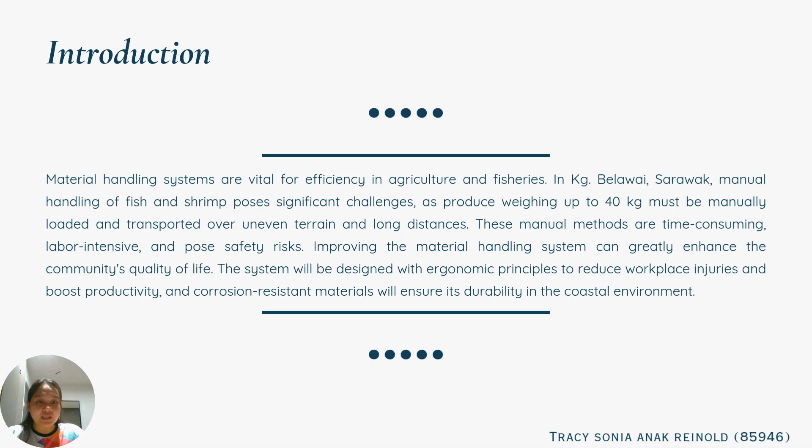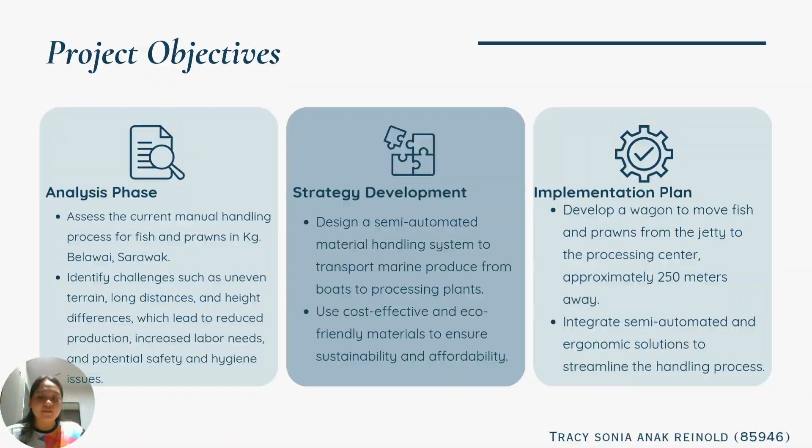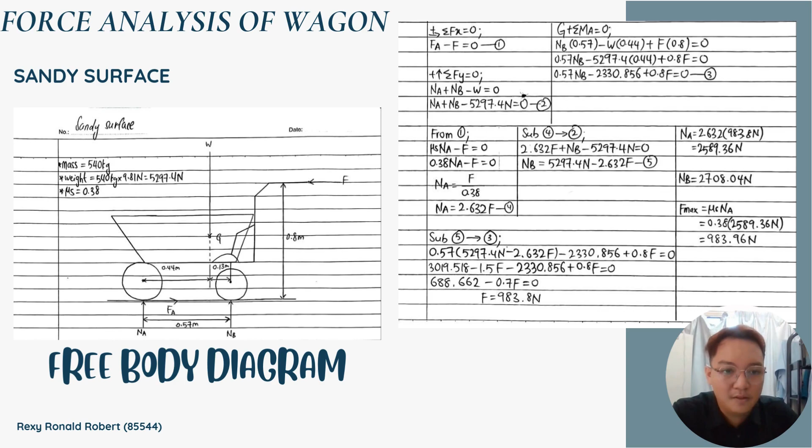After getting the force applied, we can calculate the normal force on point A and point B. Not to forget, we also need to calculate the maximum force, by using the formula coefficient of friction times normal force at point A. Based on engineering theory, if the force applied on the wagon is lower than the maximum frictional force, it cannot overcome the tendency of the wagon to remain static. So based on this calculation, for the sandy surface condition, the wagon is unable to overcome the maximum frictional force, hence it will have trouble moving.

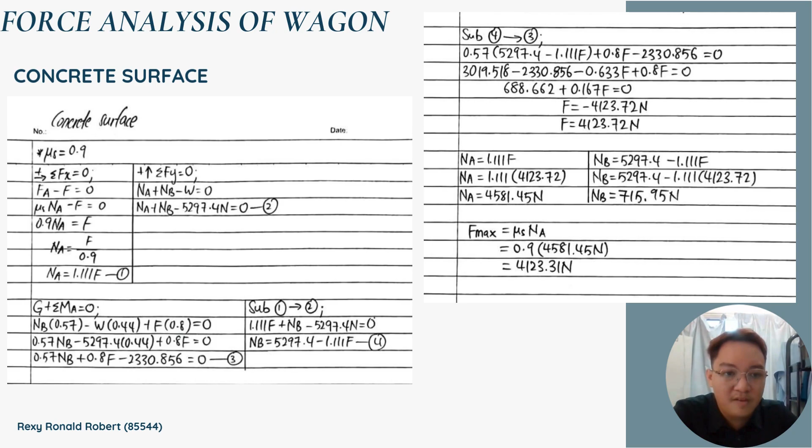So now let us proceed to the concrete surface calculation. By using the same formula and same steps, we can calculate the concrete surface by changing the coefficient of friction to 0.9. By looking at this calculation, we can see that the applied force is indeed higher than the maximum frictional force. So for the concrete surface condition, the wagon is able to overcome the maximum frictional force, hence it will have no trouble moving.

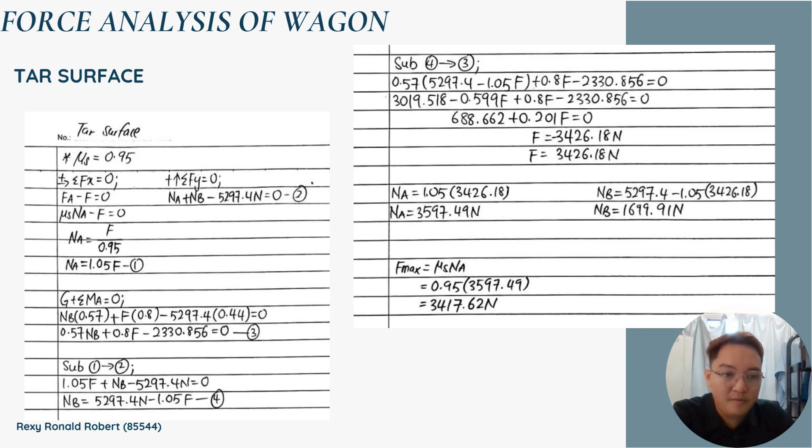Now lastly, for the tar surface, same as the previous slide, we can use the same formula and same steps, only changing the coefficient of friction to 0.95. Same as the concrete surface, the applied force on the tar surface is indeed higher than the maximum frictional force. So for the tar surface condition, the wagon is also able to overcome the maximum frictional force, hence it will have no trouble moving.

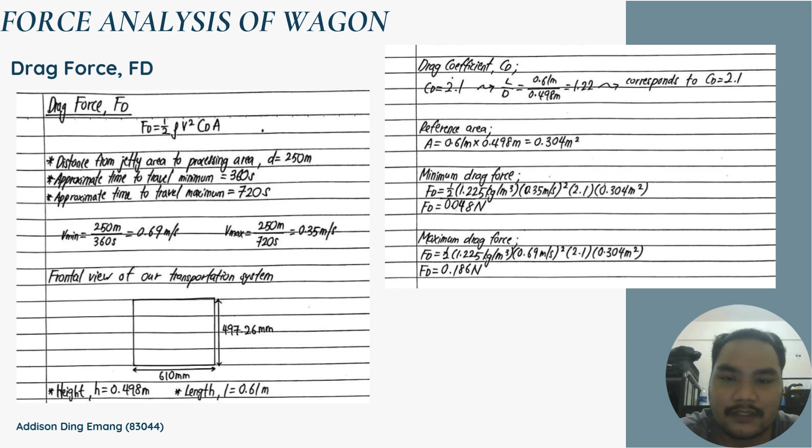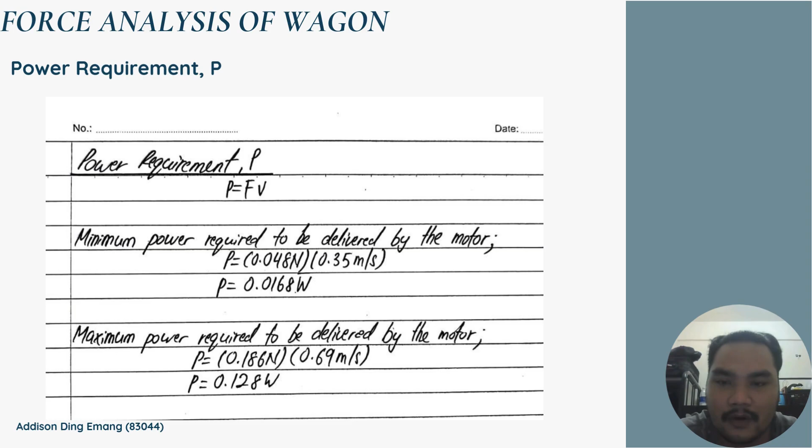And we can calculate the minimum and maximum drag force using the formula Fd equal to 1/2 rho v squared Cd A. The minimum drag force is 0.048 Newton, whereas the maximum drag force is 0.186 Newton. Since we are going to install an electric motor for our wagon, we need to calculate the power requirement. Using the formula P equal to Fv, or power equal to force times velocity, the minimum power required to be delivered by the motor is 0.0168 watt, whereas the maximum power is 0.128 watt.

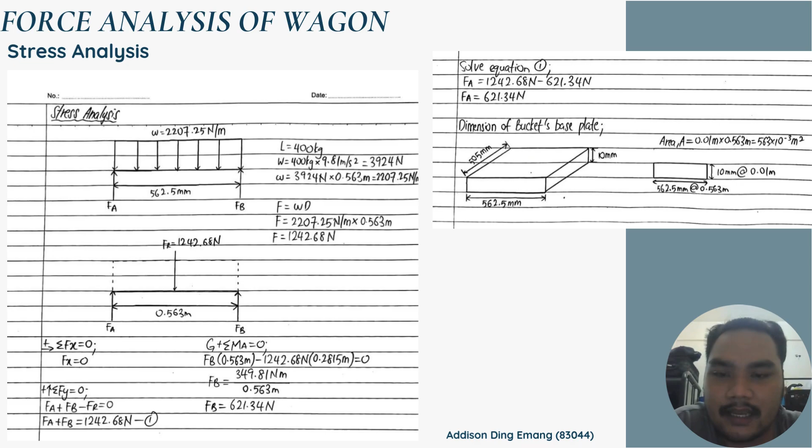So to look for the concentrated load, just multiply it back with the distance of the base plate. So the force is 1,242.68 Newton. Using equations of equilibrium, we can look for the reaction force at A and B, which is 621.34 Newton. And now calculating for stress, we just divide the force with the area, and it is 2.21 kilopascal.

Since the bucket is decided to be made of aluminium 2014-T6, the yield strength is 414 MPa. And the group decided the safety factor of the wagon is to be 2. So we divided the yield strength by the safety factor, and we get 207 megapascal for the working stress. And since the stress is less than the working stress, the design is safe to be used.

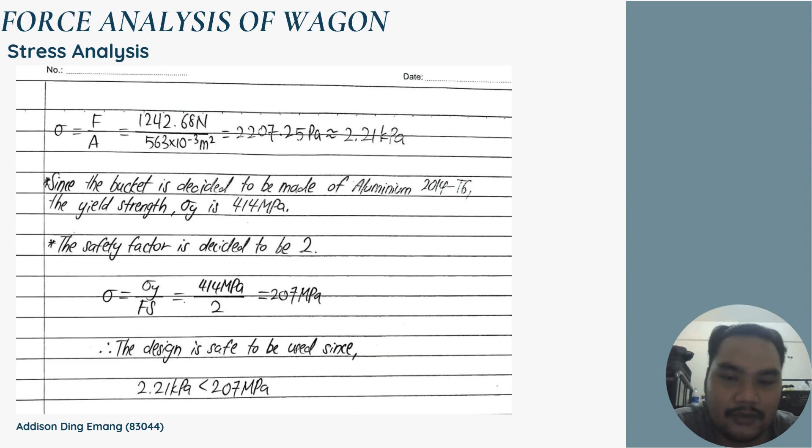The TRIZ diagram and the component analysis focuses on identifying and analyzing the components of the material handling system and their interaction with the external environment. The system components consist of the wheel, wagon bed, handle, motor, and frame, which form the essential parts of the material handling design. Each of these components plays a critical role in ensuring the system functionality. For example, the wheel is essential for mobility, the wagon bed supports the load, the handle provides control, the motor offers power for automation, and the frame provides structural stability. These components work together to achieve the overall goal of efficiently transporting loads.

The external elements or environmental problems that affect the system performance are represented by the supersystem components, which include moisture, sand, roads, and rain. For example, moisture and rain can cause corrosion or reduce the durability of components, while sand and uneven roads can increase resistance and impact mobility. The interaction between the system and the supersystem components highlights the need for a robust and adaptable design. Finally, the product, represented as the load, is the ultimate outcome that the system aims to transport effectively.

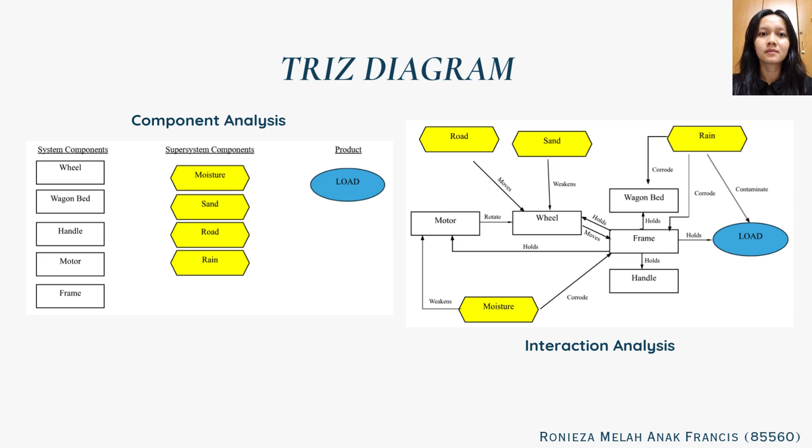This diagram illustrates the functional relationships and potential weaknesses within a wagon system, highlighting both useful and harmful interactions. The system consists of key components such as the motor, wheel, frame, handle, wagon bed, and load. The motor rotates the wheel, enabling movement, while the frame holds the wheel, wagon bed, and handle. The load is supported by the frame. External factors like road, sand, moisture, and rain impact the system efficiency.

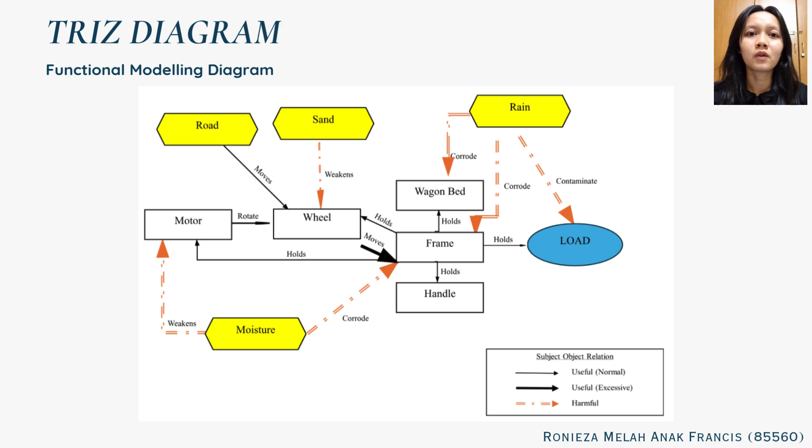The road facilitates movement, while sand weakens the wheel. Moisture and rain introduce corrosion risks, affecting the wagon bed, frame, and load. Excessive moisture weakens the motor, while rain contaminates the load. The diagram differentiates between normal useful functions, excessive useful functions, and harmful effects using different line styles and arrow indicators, providing a clear visual representation of the system limitations.

Next, the diagram presents a structural breakdown of why the wagon's load capacity cannot be sustained. The root causes are divided into 4 key issues, which are the frame breakdown, wheel failure, wagon bed instability, and motor inefficiency. Frame breakdown occurs due to weak structural integrity or excessive vibration, which may stem from an insecure frame that does not conform to other components.

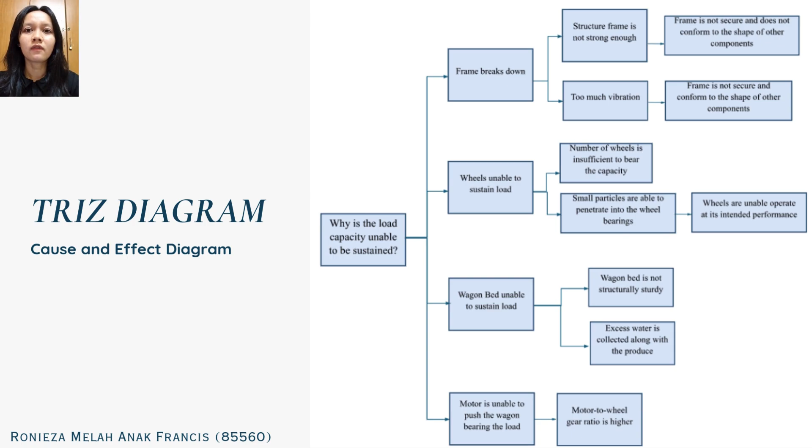Wheel failure is attributed to an insufficient number of wheels to support the load and the penetration of small particles into wheel bearings, impairing performance. The wagon bed is unable to sustain the load due to a lack of structure, sturdiness, and excess water accumulation with the produce. Lastly, motor inefficiency arises from a high motor to wheel gear ratio, preventing the wagon from effectively carrying the load. The analysis provides in-depth understanding of the limitations affecting the system performance and durability.

These requirements were prioritized based on customer input, with the highest priority given to the product's dimension, followed by cost efficiency, weight, and robustness. These priorities guide the development process to ensure the design meets the most critical customer expectations. The technical requirements, Room 2, provide a set of measurable attributes, including the product's dimension, weight, life cycle, cost efficiency, eco-friendliness, and resistance to corrosion. These features are directly linked to customer requirements and serve as a foundation for the design process. Each technical requirement was developed to ensure the system performs optimally under varying conditions.

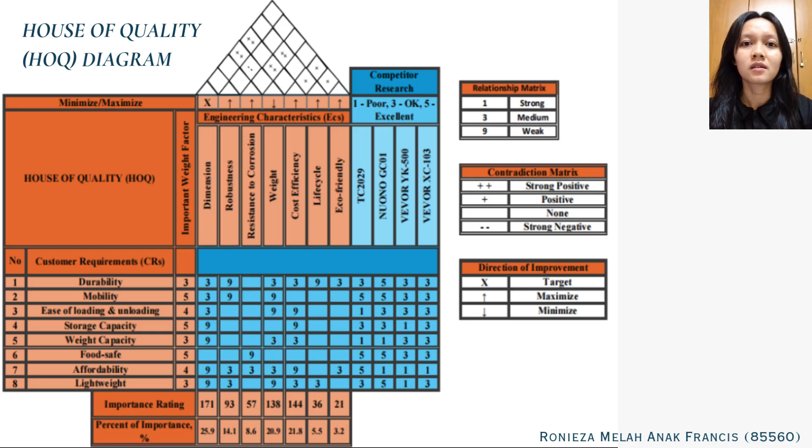After reviewing all 5 designs, we have chosen Concept Design 1 because it offers the best combination of simplicity, reliability, and practicality. The straightforward design means it's easy to manufacture and has fewer parts that can fail, making it reliable for daily use. It's also low maintenance, with quick, simple repairs that don't require special tools. The design is stable, even when carrying heavy loads, which is great for uneven terrain. Plus, its lightweight structure makes it easy to handle, even in tight spaces, ensuring it's usable in different environments. While the open structure does expose the load to weather, this can be managed with coverings or containers. Overall, Concept Design 1 stands out for its ease of use, stability, and reliability, making it the best choice for our needs.

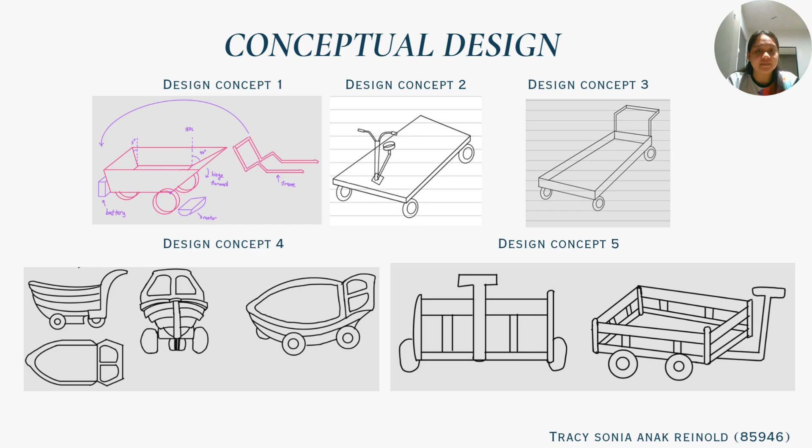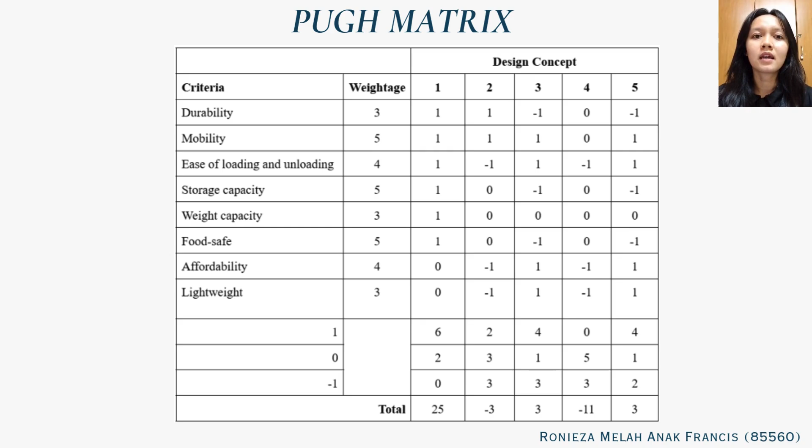Although Design Concepts 3 and 5 perform reasonably well, they may require certain refinements. Meanwhile, Concepts 2 and 4 are not recommended as they have negative performance scores indicating they do not meet the desired requirements effectively. So, as an overview, the final design is a motor-assisted wagon that operates similarly to a wheelbarrow, whereby it is designed to be pushed from the back by an operator.

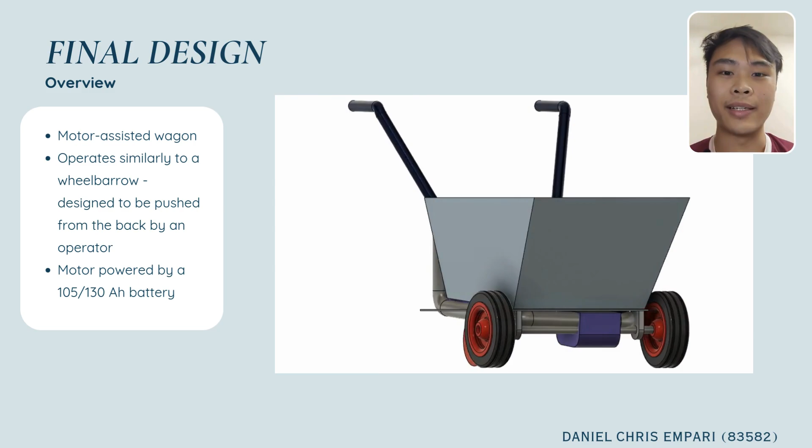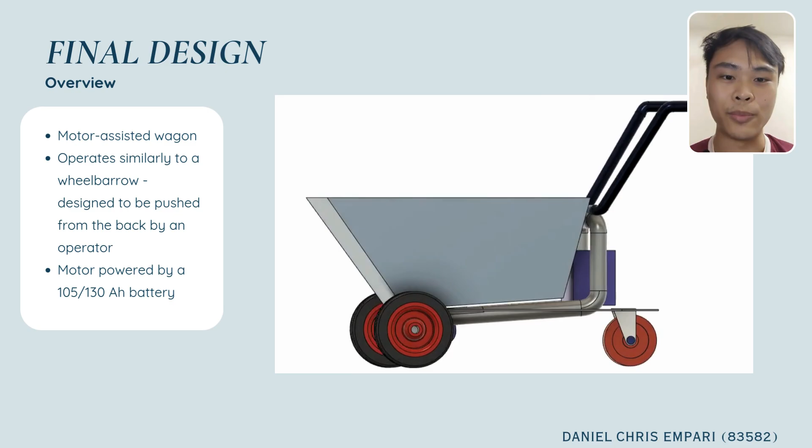To enhance its usability and efficiency, the wagon is equipped with a motor powered by a 105 or a 130 Ah battery, which significantly reduces the physical effort required to push the load. The material used for the bucket is aluminum alloy coated with Teflon or PTFE, which prevents water and other liquids containing hydroxyl and oxygen from being absorbed, allowing the bucket to be rated food safe. The frame of the wagon is made from mild steel, ensuring the durability and strength required to handle loads of up to 500 kilograms while maintaining structural stability.

Loading and unloading operations are streamlined with a front loading and tilting mechanism where, upon reaching the destination, the wagon employs a forward tilting mechanism hinged at the front, allowing the bucket to be tilted smoothly. This mechanism enables fast and safe unloading of the produce without causing damage and spillage, so it ensures the sea produce remains intact. It also minimizes physical strain on the operator, making the unloading process both ergonomic and efficient.

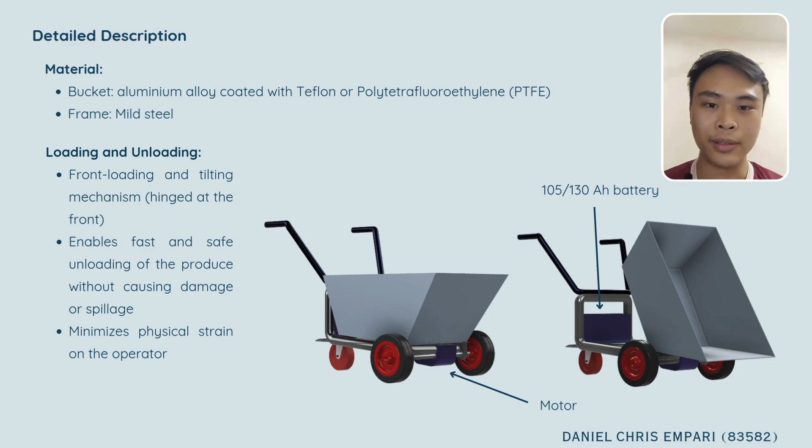Here you can see where the motor and the battery are placed. The battery is placed just below the handlebars to act as a counterweight, and the motor is placed next to the front wheels to move the front wheel. The wagon's mobility system includes a handle fixed to its frame and a swiveling caster mechanism, which allows for easy maneuverability, especially in tight corners. The motor is attached to the front wheels, which assists in moving the wagon effortlessly, even under full load, ensuring smooth operation across the operated terrain, which includes sandy, concrete, and asphalt terrain.

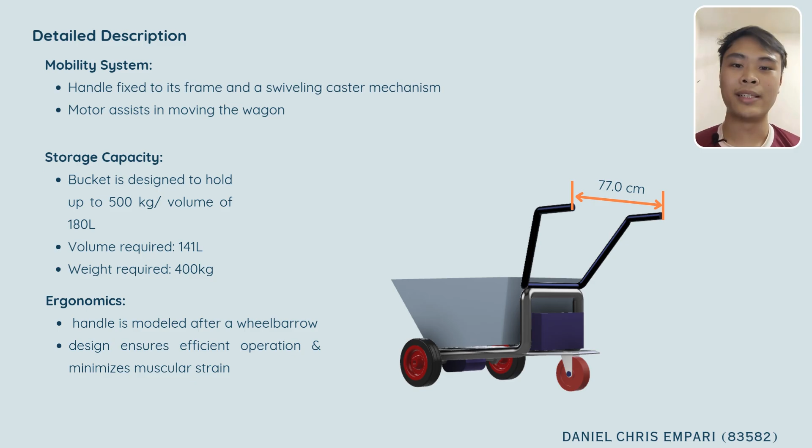The storage capacity of the bucket is designed to hold up to 500 kilograms or a volume of 180 liters, which exceeds the 141 liters required to carry the 400 kilograms of shrimp. This ensures the wagon can handle its intended load efficiently without compromising on performance. In terms of ergonomics, the handle is modeled after a wheelbarrow, so this design not only ensures efficiency in operation but also minimizes muscular strain for the operator, which allows extended usage without discomfort. The wagon's combination of ergonomic design, motor assistance, and ample storage capacity ensures that it meets both functional and user-friendly requirements. Here is a detailed illustration of the final design with units of measurement in millimeters.

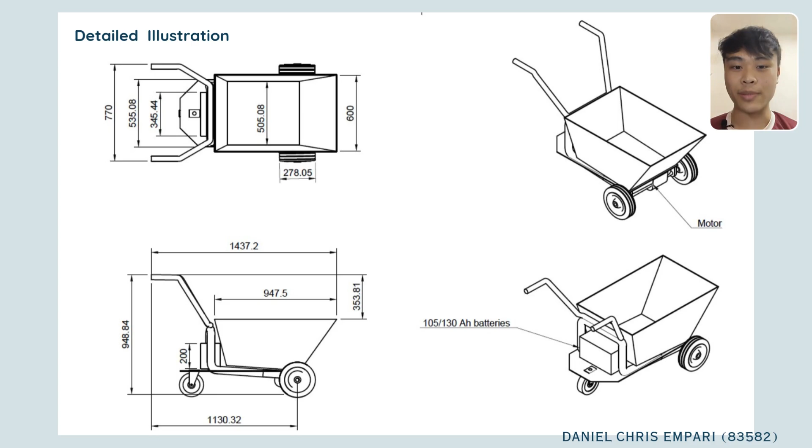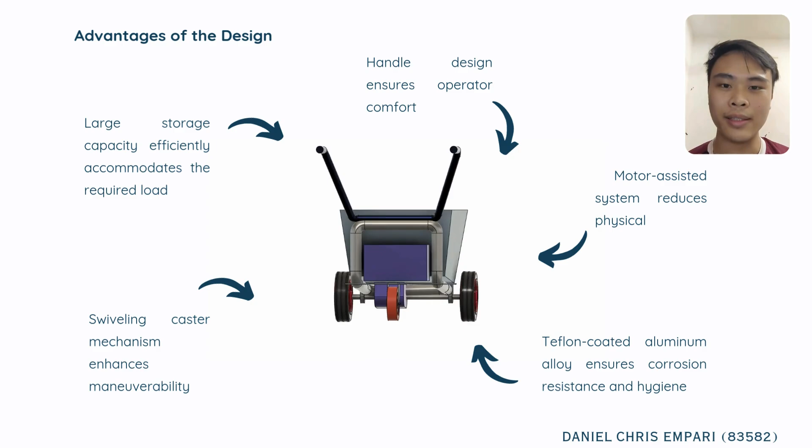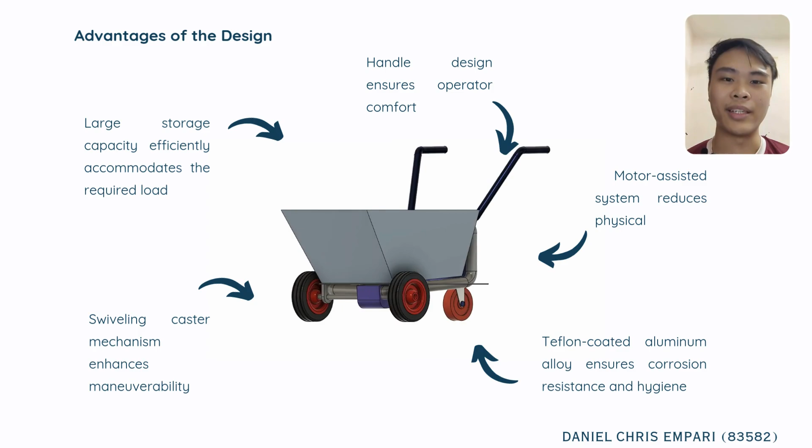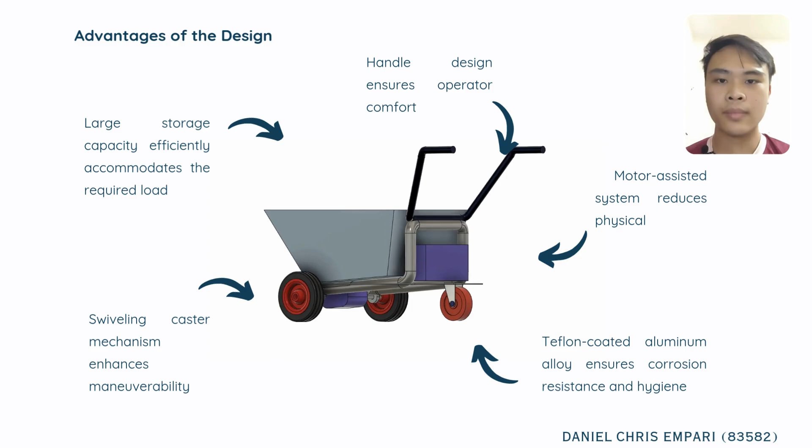Among the advantages of this design is that it is motor assisted. The system reduces the physical strain of the operator, making it ideal for long distance transportation. The use of Teflon-coated aluminum alloy ensures corrosion resistance and hygiene, extending the wagon's lifespan. The swiveling caster mechanism enhances maneuverability, making it easier to navigate tight spaces, while the large storage capacity of the bucket efficiently accommodates the required load of 400 kilograms. The ergonomic handle design ensures operator comfort even during prolonged use. So overall, the final design is an effective solution that combines functionality, durability, and user convenience.

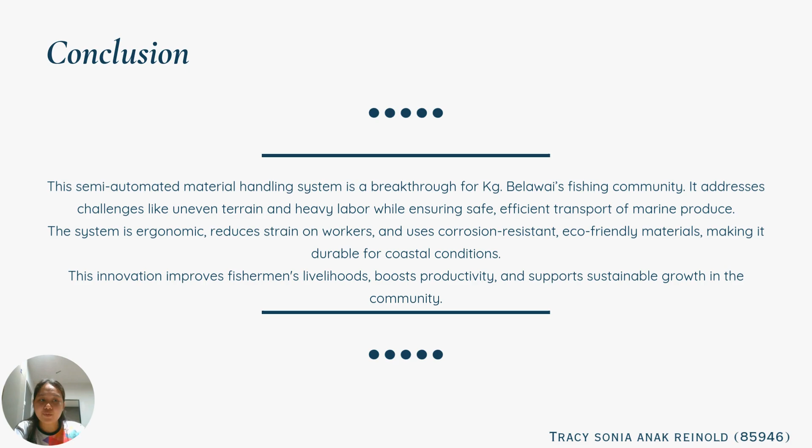This semi-automated material handling system is a breakthrough for Kampong Belawai's fishing community. It addresses challenges like uneven terrain and heavy labor while ensuring safe, efficient transport of marine produce. The system is ergonomic, reduces strain on workers and uses corrosion-resistant, eco-friendly materials, making it durable for coastal conditions. This innovation improves fishermen's livelihoods, boosts productivity and supports sustainable growth in the community.